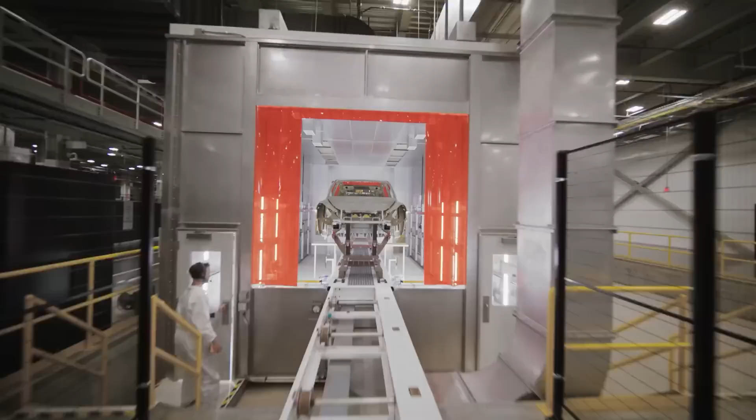2023 will be the year of the Tesla Cybertruck, as one of the most anticipated and controversial automotive designs ever created finally comes to production at Giga Texas. We said the same thing about 2022, but this time we're most correct we've ever been. All signs point towards a Cybertruck release in 2023, a long time since the original concept unveiling back in 2019. A lot has changed with this electric pickup truck since then, mostly for the better. Elon Musk wants to make the Cybertruck a showcase for Tesla's cutting-edge technology, like making a truck and a boat all in one. Let's talk about how the Cybertruck will live up to its hype and push vehicle design to a new level.

Let's knock down a few known knowns before getting into weird stuff. The original Cybertruck spec sheet from 2019 is completely out the window. Tesla hasn't even listed it on their website in months, but Elon Musk says the top-tier Cybertruck will have both four-wheel steering and four-motor all-wheel drive. These are important features, not only for performance benefits in extreme use cases like off-roading, but also for making the vehicle more accessible for a wider range of drivers. Elon Musk's primary goal with consumer products is to build things people love, so making the product as user-friendly as possible plays directly into that philosophy.

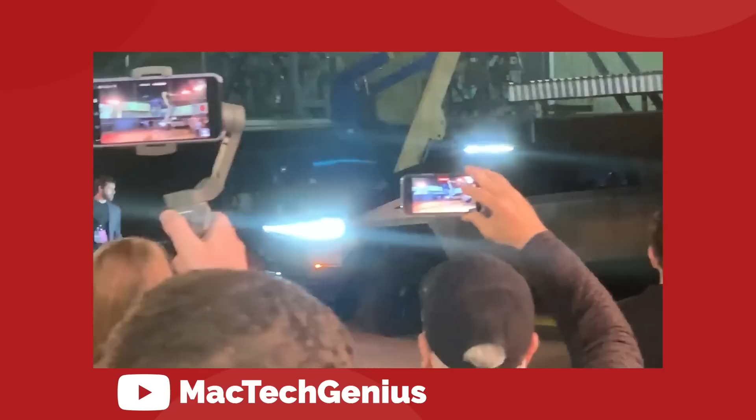It's not impossible to drive a large vehicle without these technical advantages. There are plenty of dudes out there who mob around in Ford F-350 pickups, but if you put the average car driver behind the wheel of one of those things, they'd probably rather shit their pants than try to navigate into a parking spot.

Four-wheel steering fixes a lot of this problem. That's why GM put it in their Hummer EV, a similar humongous vehicle platform to the Cybertruck. I'm not sure exactly how they compare, but they look pretty much the same size. With four-wheel steering, these monsters can achieve a turning radius similar to your average sedan or small SUV, or sometimes even better, allowing for diagonal crab walk travel. Whether the Tesla is driven manually or drives itself, this eliminates the need for awkward 3, 4, or even 5-point turns in tight environments like parking lots or narrow streets. The truck will simply go where you want it to go.

The decision to upgrade to four-motor all-wheel drive works towards the same goal. We've already seen this four-motor powertrain used by Rivian for their R1T, marketed as a weekend warrior adventure truck, equally fun to drive in the city as in the mountains. A big part of keeping those weekend excursions fun is avoiding getting stuck or sliding off the path and crashing. Both of these unfortunate events are rendered nearly impossible by the Rivian's independent four-motor all-wheel drive.

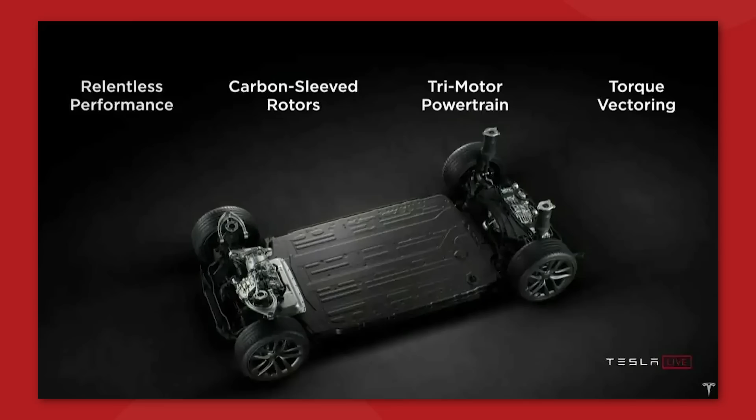I've never driven one, but it does seem like a foolproof system. As long as one wheel stays in contact with the ground, the truck is going to go where you want it to go. We've seen the kind of traction and stability Tesla is capable of with three motors in the new Plaid vehicles. The fact that every single Model S and X Plaid ever created hasn't already been crashed is a testament to how stable these vehicles are. I think the combination of the two in the Cybertruck will make for a vehicle that people love to drive and are confident to drive in all scenarios and road conditions.

Driving ability or experience doesn't really matter as much when so much of the experience is being augmented by technology. As someone who lives in a place where the ground is covered in snow and ice for 4 months of the year, I can't imagine anything better.

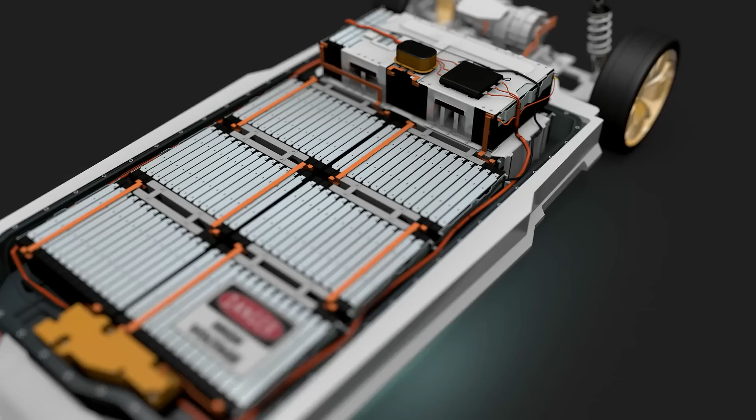What we know for a fact is that Tesla vehicles do handle water exceptionally well. We've now seen plenty of examples of them driving through extremely flooded roads and pushing through like tanks while conventional vehicles end up literally dead in the water. A lot of this is because combustion vehicles have tailpipes, and if those get blocked by water, CO2 can't escape the engine, and it halts the combustion process. These floodwater performances have also proven that the Tesla battery pack and electronic architecture is waterproof to the point where it won't short out even when submerged.

But can a Tesla really float? That's all a matter of displacement. As long as an object displaces a mass of water that is equal to or greater than the mass of the object, it will float. And the Cybertruck has the advantage of being very long and very wide, similar in shape to a barge, which we know is capable of floating a very large amount of mass. So it does check out.

But can it actually be waterproof enough? Because if water starts leaking into your object, that will increase the mass, and eventually that displacement equation will flip, and the object will sink. At that point, don't even bother trying to tell your insurance company what happened. You will be blacklisted from all coverage for life.

Elon wants his truck to navigate the channel of water that separates his Starbase rocket testing facility from the nearby island of South Padre. This makes sense because South Padre is the closest populated area to Starbase. But as it stands, they have to drive around the water in a big loop that takes a bit less than an hour to drive. If you were to cut straight across the 500-meter channel, Elon could get to town in just about 20 minutes.

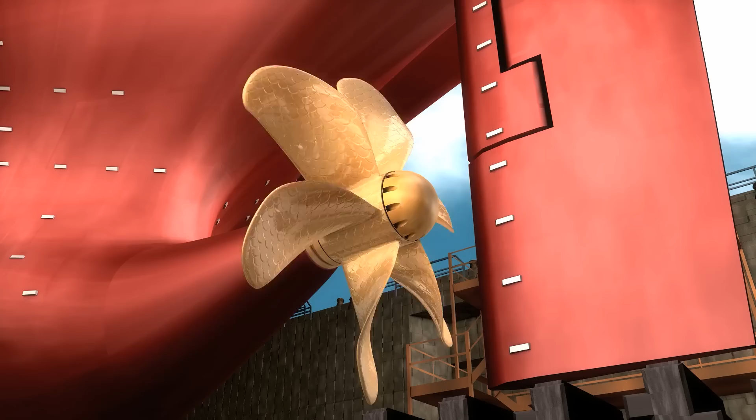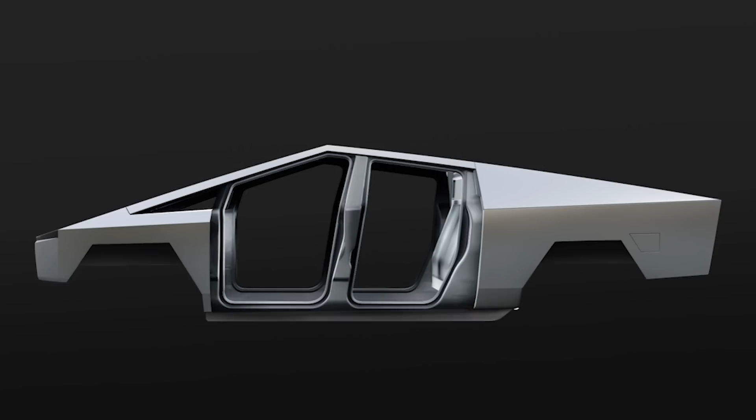Elon said that he might consider an electric propeller on the tow hitch to increase the Cybertruck's marine velocity, or maybe devise a wheel hub design that can generate meaningful thrust. Whether or not the Cybertruck can be truly waterproof has a lot to do with how they construct the body, and that's something we are still learning about.

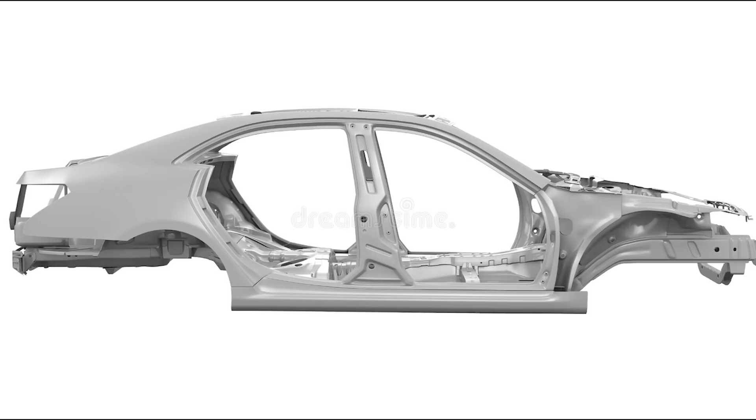We know that the plan for the Cybertruck was always to implement an exoskeleton-based unibody design. This is pretty unique for any vehicle, and it's especially unique for a pickup truck. Most vehicles already have a unibody construction. It means that the upper body of the vehicle and the lower frame are integrated into one structural mass. They share the load that the car experiences, and because that load is distributed among many parts, no one part has to be particularly strong.

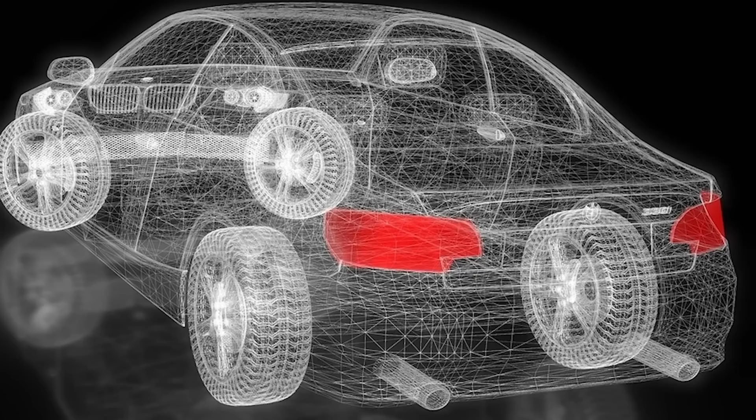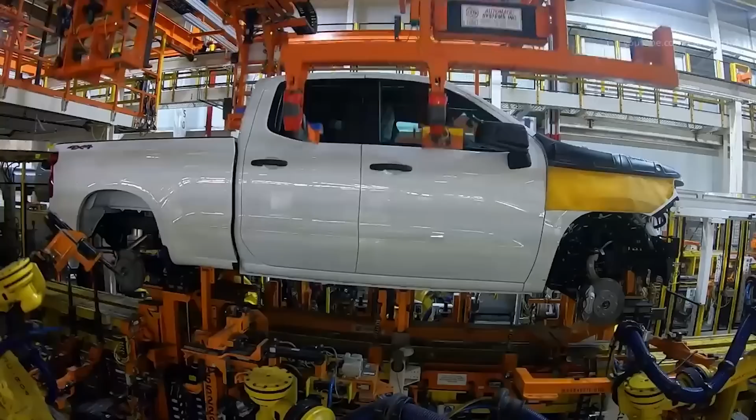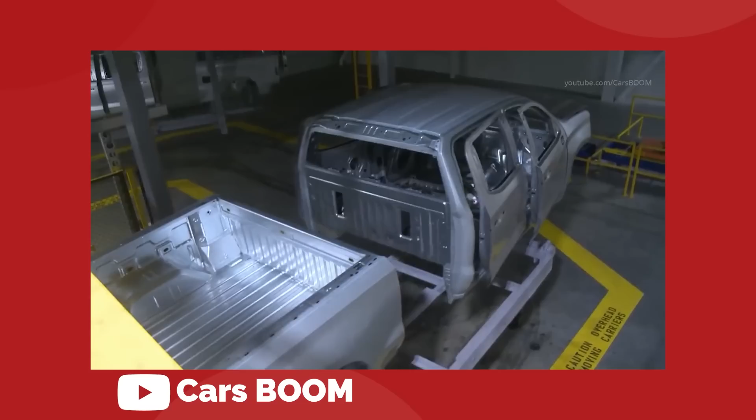Pickup trucks are different. They use body-on-frame design, so the body and the frame are not integrated. The body is just dropped on top of the frame and bolted down. And they do this mostly because pickups need to be a modular design. There are so many use cases for a pickup truck: a long bed with a short 2-door cab, a long 4-door cab with a short bed, or even a long 4-door cab with a long bed. Truck platforms need to be adaptable to commercial applications like a tow truck or a flatbed. Because of this, a pickup frame has to be incredibly strong to stand alone under heavy load situations like towing.

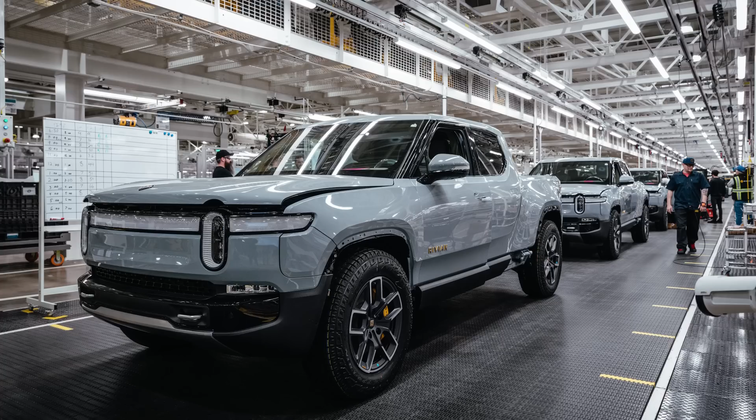There are some unibody trucks, but they're more in the class of the Rivian, weekend warrior adventure trucks, and they're not considered to be proper utilitarian work trucks. With the Cybertruck, Tesla really wants to appeal to both sides. The giant stainless steel body is designed to be incredibly rugged and stand up to legitimate heavy work situations. And the exoskeleton will allow the Cybertruck to push past the limit of a conventional body-on-frame design.

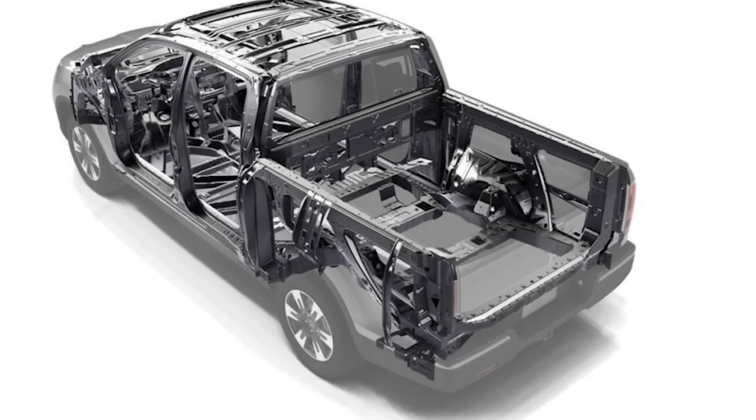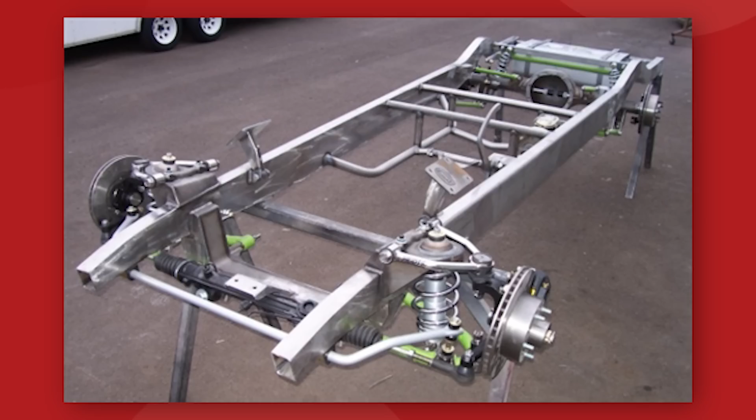Even on a unibody design where the upper body is providing structure, the outer shell of the vehicle is still just dead weight. The panels do nothing to carry the load, but the Cybertruck has these big triangular-shaped steel panels. And even us non-engineering types know that triangles are very strong shapes, and steel is a very strong material. So the Cybertruck outer shell can actually serve as a load-bearing part of the structure, further distributing the weight across the vehicle body. This eliminates the need entirely for the typical heavy-duty underframe of a pickup truck, and it even eliminates the need for a lot of the upper body structure that you'd find in a car. This reduces the overall weight and greatly reduces the complexity of the design, which in turn makes the truck cheaper and easier to manufacture.

On that same note, we know that Tesla is implementing two of their cutting-edge design technologies from the new Model Y into the Cybertruck: the structural battery pack and the Giga casting.

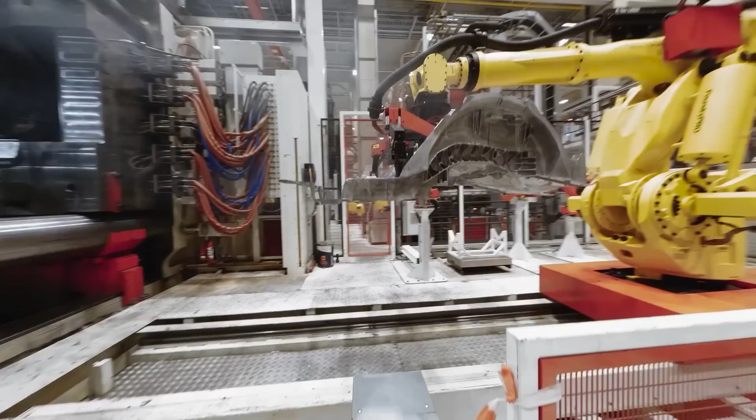The structural pack uses wide-diameter, steel-shelled 4680 cylindrical battery cells, sandwiched between two metal plates and filled with structural foam to create a solid brick at the center of the vehicle that serves double duty as battery and frame. It's incredibly rigid because you have a metal box filled with metal cylinders packed tight with a plastic foam that fills all voids within the box. It definitely is waterproof, and it's probably even bomb-proof.

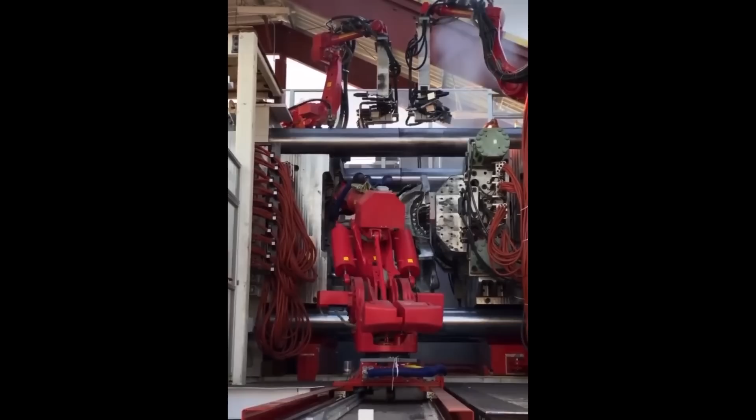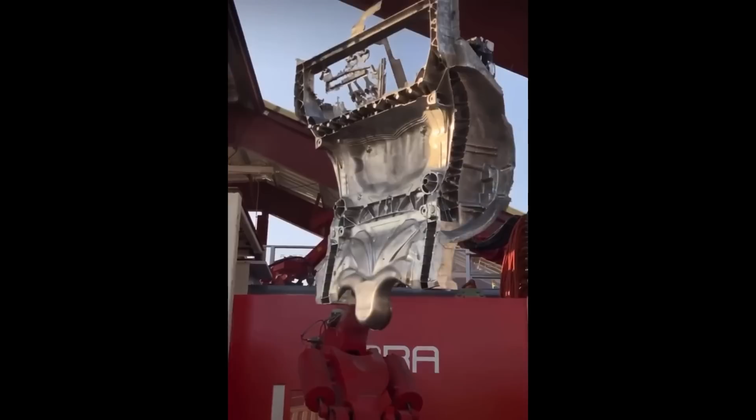Tesla is going to tie that structural battery together with two solid Giga castings to complete the underbody frame. Giga casting means you can form liquid metal in a giant mold to create large sections of the vehicle in a single piece. So the entire frame section in front of the battery will be a single casting, and the entire frame behind the battery will be a single casting.

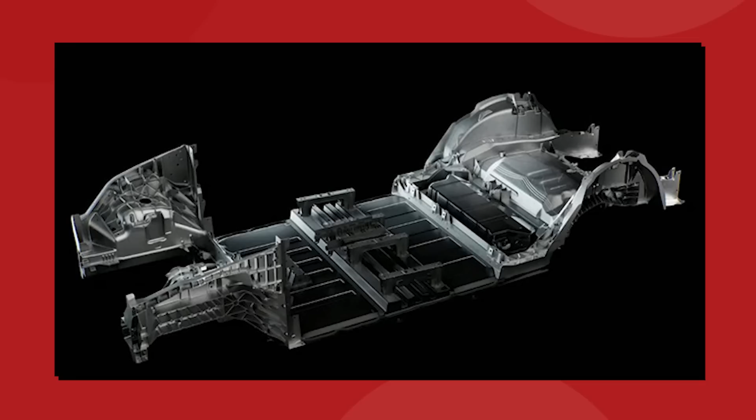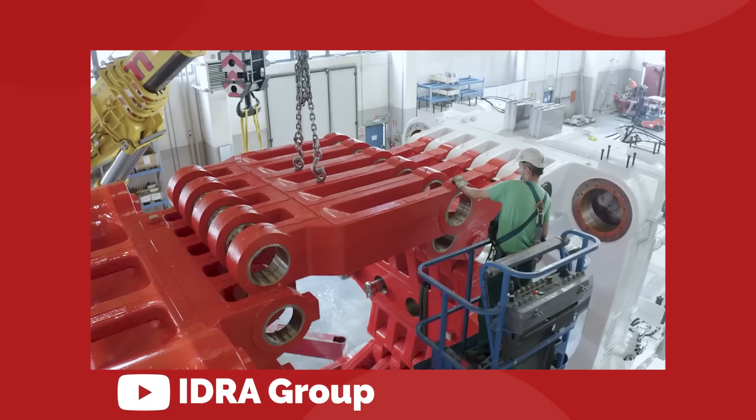On a conventional vehicle like the Model Y, both front and rear are formed with the same machine because they are more or less the same size. That's a 6,000-ton die casting machine. But looking at the Cybertruck, we can see that the front end is pretty short, but the rear end is very long, and that's why Tesla had to order an even bigger version of what was already the world's largest casting press. This is the 9,000-ton Giga press that was recently completed by the Italian Idra Corporation.

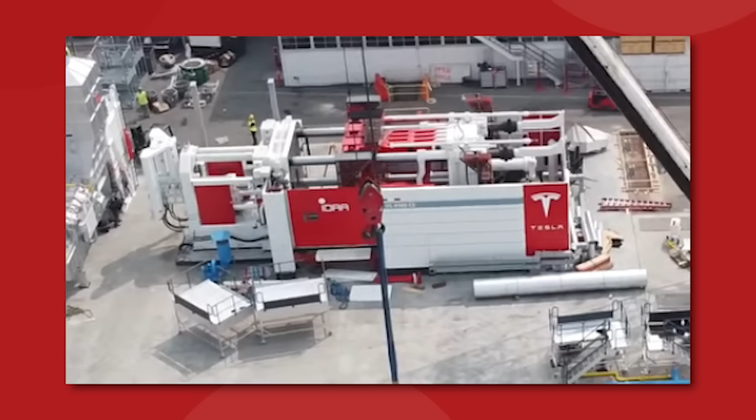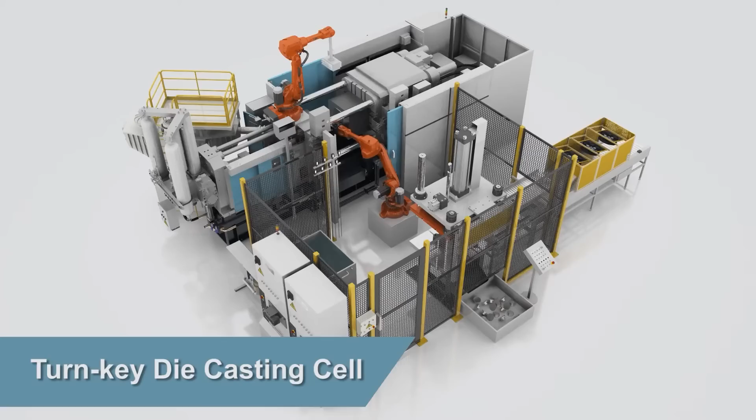They showcased the finished machine this summer and have already begun shipping it to Tesla for final assembly in Texas. At least one batch of components for the new press has already made landfall in the United States, and more should be on their way. These machines are massive, like the size of a small house, and they incorporate the melting furnace, the press, and the extraction all into one self-contained process. So it's going to take a while still for Tesla to get this set up and tested and calibrated for action on the Cybertruck production line.

So here are two important things that we know incredibly little about: when will these trucks be in production, and how much will they cost? The tricky thing with Elon Musk is that he's almost always wrong when it comes to predicting timelines. He consistently runs on a schedule that is moving about twice as fast as the actual human capability to achieve his goals. But all we can really do is report on what he is claiming to be true at any given time.

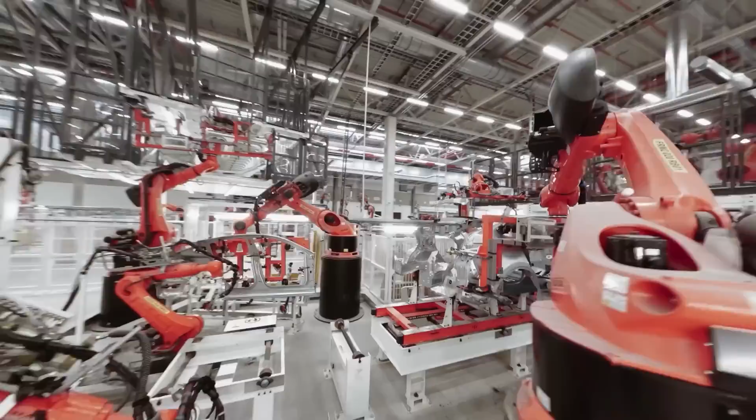As it stands, the Cybertruck is said to be entering production at some point in 2023, probably closer to midway through the year. I'll let you in on a little secret: that could be Elon Musk talking more shit. But if we look at the facts, we can say that Elon is closer to being correct than ever before.

For example, the factory where the Cybertruck will be produced, Giga Austin, is actually up and running and producing Tesla vehicles at ever-increasing levels of volume. That was never the case when Elon made any of his previous timelines, but it is now.

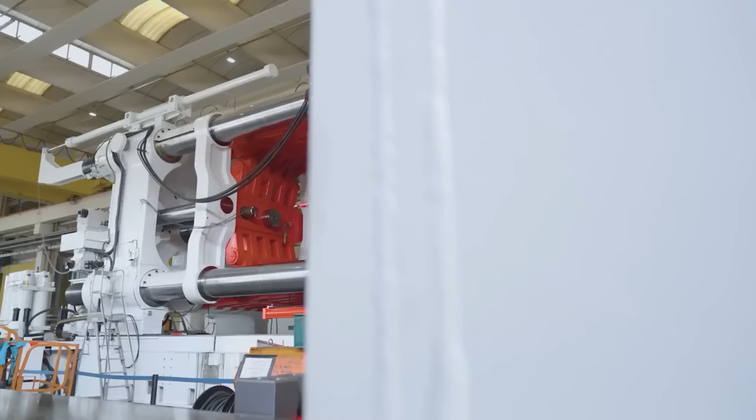Also, that 9,000-ton Gigapress is complete and on its way to being operational on the production floor. That was also never the case when Elon was making up delivery timelines. If the press is necessary to make the truck, then you never could have possibly made the truck before the press. And thirdly, Tesla is in production of their new 4680 battery cell, which is critical to making that structural battery pack happen.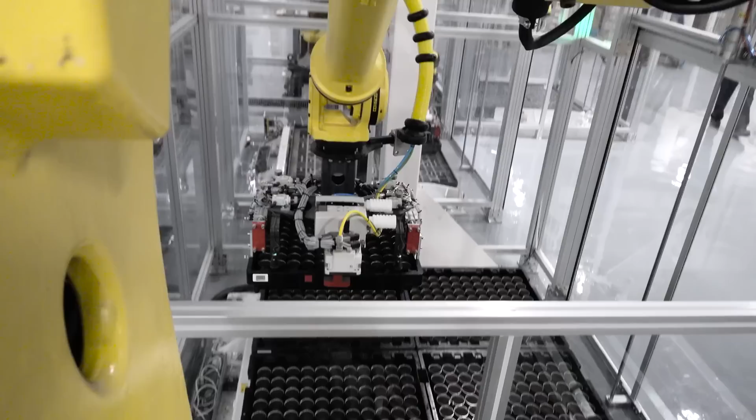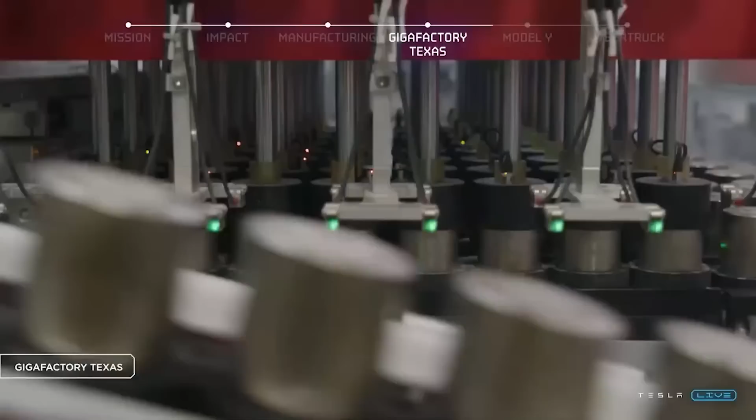They need the wide diameter cells to create the rigidity. The manufacturing of that particular battery didn't get off to a great start, but now the company has had a year to work through the process, and they seem to be doing pretty well at ironing out the kinks. They still have another 6 months or so to really get it together in time for the Cybertruck production run, so that doesn't seem so far-fetched either.

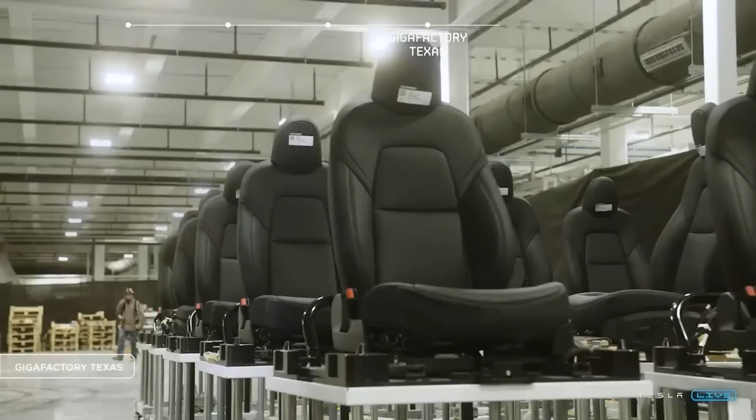As for how much this is all going to cost, with the 4-wheel steering, the 4-motor powertrain, the boat-level waterproofing, and the massive effect of price inflation on the cost of goods, it's definitely not going to be 69 grand. I can guarantee you that much.